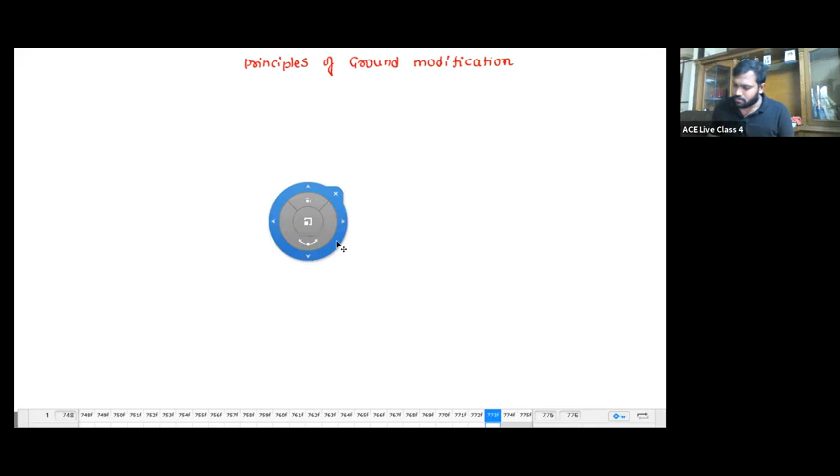Now let's come to this chapter. Actually I will include geosynthetics in the principles of ground modification techniques only. So coming to this chapter: principles of ground modification techniques. So what is the meaning of this principles of ground modification technique? What is the main purpose? The name itself says to modify the ground, that's it.

To modify the ground. In the case of the principles of ground modification techniques, what we are going to learn is, as I told you in yesterday's soil exploration chapter also, actually no soil is vulnerable, no soil is a weak soil, and no soil is a destructive soil. The soil will fail by accompanying to the structure on it.

For example, let me see this one. You know quicksand and liquefaction, right? Liquefaction and quicksand occur in the case of fine sands and silts. But do you think wherever there is fine sand and silt, there is going to be quicksand and liquefaction? Tell me, I want answers from you. Do you think wherever there is fine sand and silt, every time a liquefaction and quicksand condition occurs?

No. When does the liquefaction or quicksand condition occur? Though the soil is fine sand and silt, if there is an earthquake, then liquefaction comes into existence. And if there is an upward seepage, and in such a way that upward seepage must be equal to submerged pressure, gamma W into H is equals to gamma dash into H, then the soil will fail.

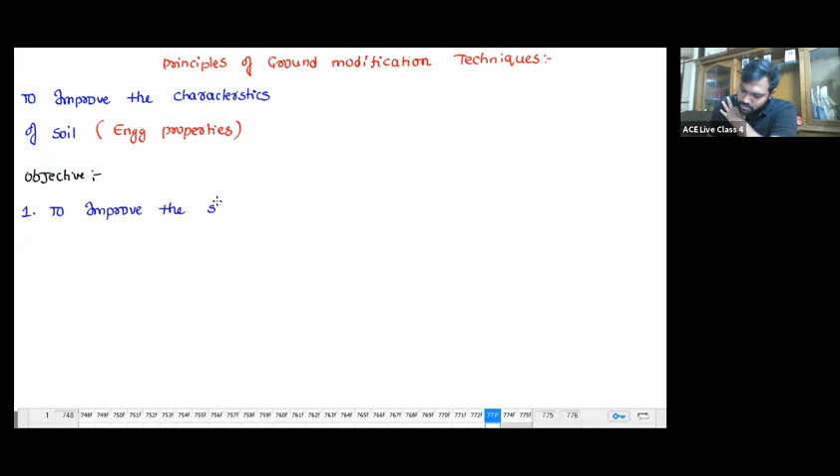Now if you observe the objective - what is our objective, sir? To improve the shear strength such that stability and bearing capacity of soil increases. So the objective is to improve the shear strength such that the stability and bearing capacity of soil increases.

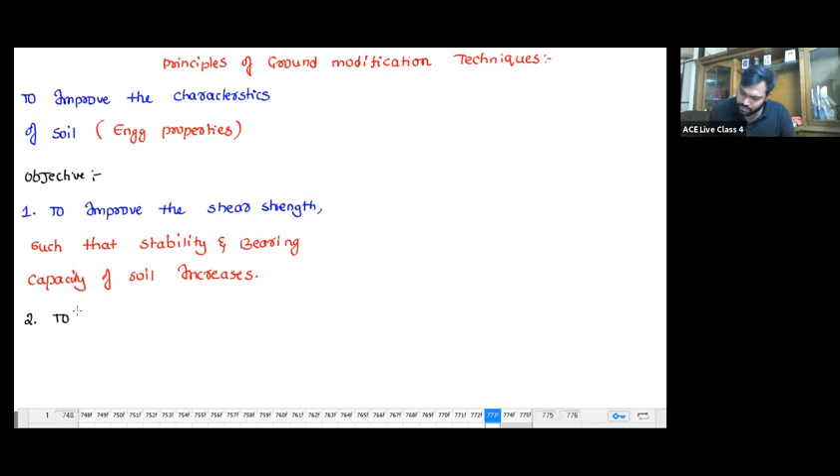Next, to reduce the compressibility of soil such that settlements of a structure reduces. So before construction itself, my main aim is number one, to improve the strength, number two, to reduce the compressibility.

Why, sir? In chapter 16, bearing capacity or shallow foundations, I told you we construct the foundation keeping certain things in mind. We should not allow the soil to fail either by shear or by excessive settlement. So the foundation should be designed for no shear failure and no excessive settlement. Which means I have to improve the shear strength, and in order not to cause excessive settlement, I have to reduce the compressibility. That's it.

It's not rocket science, nothing too complex here. So this is going to improve the characteristics, and now let's see what are the various methodologies.

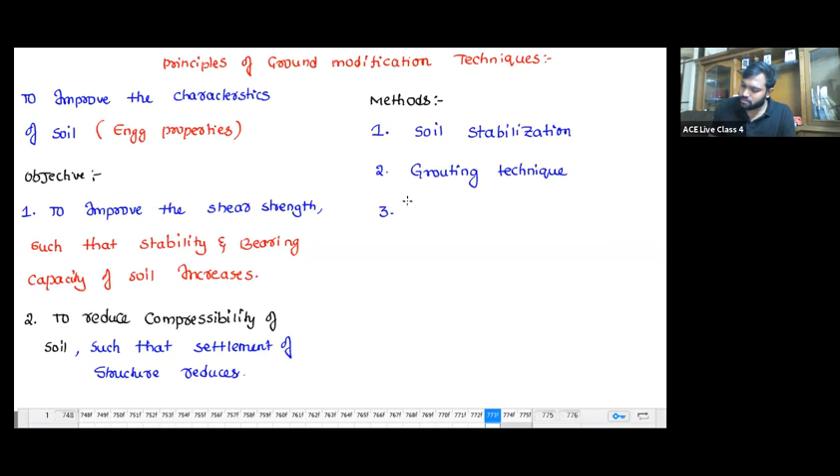Number one, soil stabilization. Number two, grouting technique. Number three, reinforcement. Number four, geomembrane, geosynthetics. Number five, dewatering techniques. So soil stabilization, grouting technique, reinforcement, geosynthetics, and dewatering techniques - these are the things we are going to discuss. Out of this, I have already included geosynthetics, which means the principles and uses of geosynthetics I am going to discuss in this same chapter.

Now, what is the meaning of soil stabilization, sir? Stabilization means to improve the strength and to reduce the permeability. We are going to do some stabilization like mechanical stabilization and chemical stabilization. Let's see what this stabilization is.

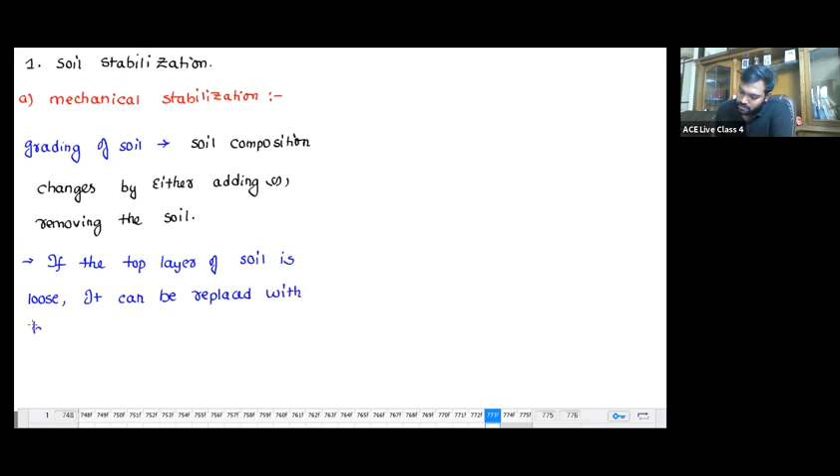If the top layer of soil is loose, it can be replaced with highly graded material, which in turn improves the grading of soil. So first, the soil composition changes by either adding or removing the soil. And then we are going to do the compaction.

After grading the soil, it should be compacted. What is the purpose of compaction? I have given you the necessity of compaction - to improve the strength, to reduce the permeability, and uneven volume changes like swelling and shrinkage are there.

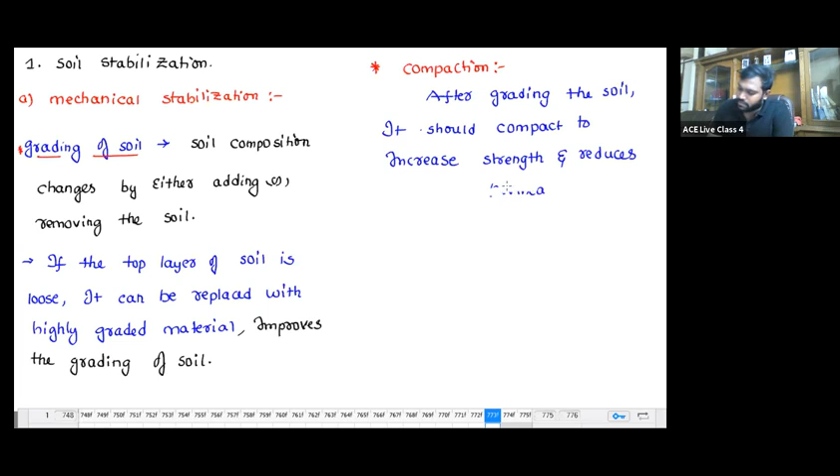To increase strength and reduce permeability, or in other words, reduce compressibility. So what are the various types of compaction we are going to do? In the case of compaction, there is shallow compaction and there is deep compaction.

The shallow compaction we are going to do by means of rollers: smooth wheel roller, pneumatic tire roller, and sheep foot roller - all these come as rollers. And the deep compaction comes by means of blasting technique, by means of impacting or impact loads, by means of vibro flotation.

You don't need to worry what are those methods, but you just need to know what are the various methods. What are the various methods? Okay, so this is about the compaction.

In the case of mechanical stabilization, I'm telling you again, we have to know what our main aim is, what is going to happen. So in mechanical stabilization, I am not adding any chemical. I'm just adding or removing the soil, and I'll improve the grading. Once you improve the grading, you simply compact it to increase the strength and reduce the permeability. So this is about mechanical stabilization.

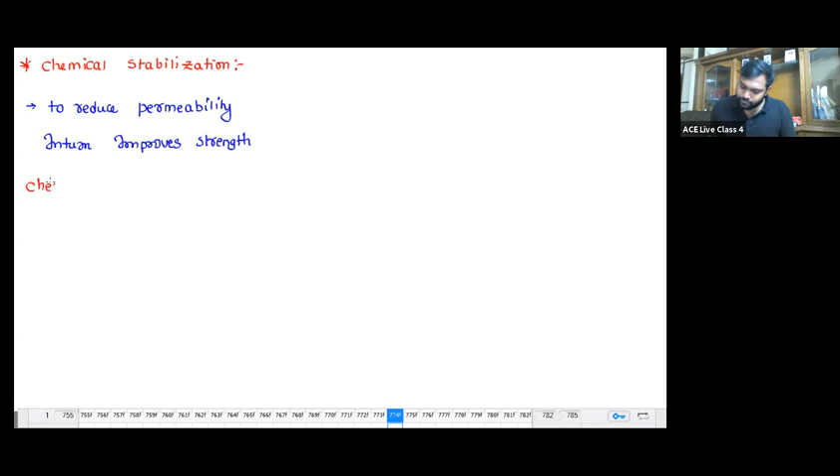The various chemicals that I can use are calcium chloride, CaCl2, sodium silicate, Na2SiO3. Okay, so calcium chloride and sodium silicate. And then we are going to see the other chemicals like lime, Ca(OH)2, bitumen. So these are the various types of chemicals that we are going to use.

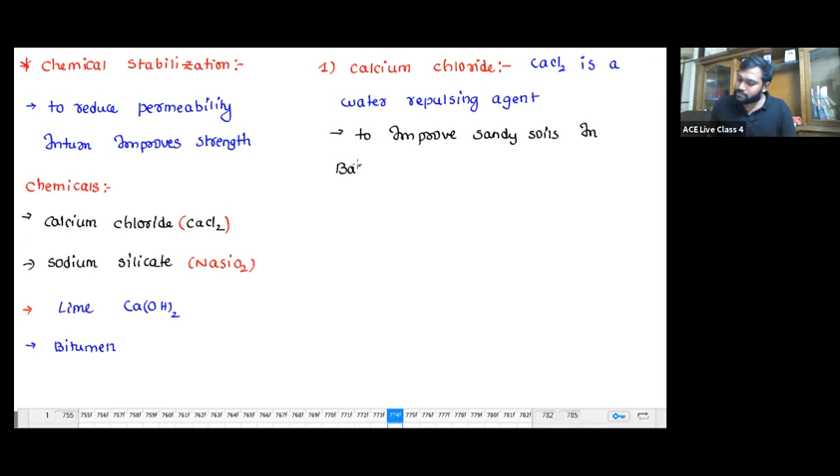So CaCl2 is a water repulsing agent, and it is used to improve sandy soils in base and sub-base courses of pavement.

Now, so CaCl2 is a water repulsing agent, and the second one is sodium silicate. So what is this sodium silicate, sir? Whenever you add this sodium silicate with water, this chemical with water along with calcium chloride - you are going to use both. So sodium silicate plus water plus calcium chloride.

When added to soil - when you mix the sodium silicate plus water plus calcium chloride into the soil mass, this mixture gives an insoluble precipitate known as silica gel. It induces an insoluble precipitate, silica gel, into the voids. Thereby permeability reduces.

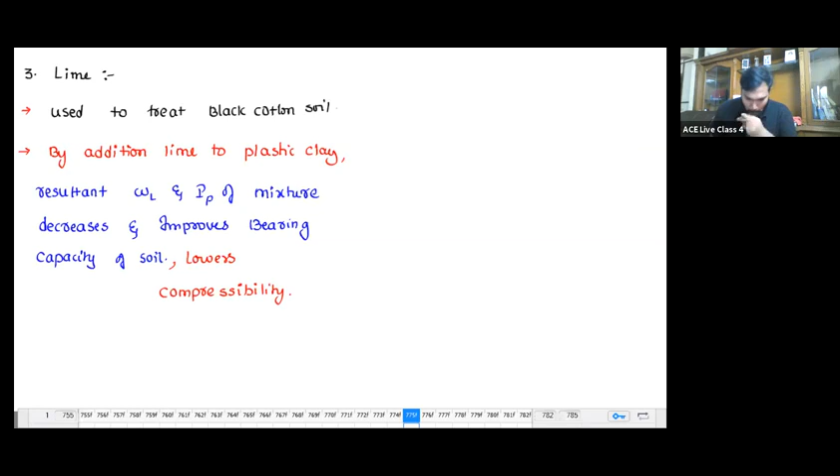Lowers compressibility. That's about lime. Yes, they have used it for the Leaning Tower of Pisa also.

Okay, next one: bitumen. Various forms of bitumen such as tar and emulsion are used to stabilize the subgrade and base courses of gravel and sand.

So in the case of gravel and sand, we are going to use bituminous tar and bituminous emulsion. Can we consider adding chemicals below PCC for anti-termite treatment as soil stabilization? No, that's not soil stabilization. That's to prevent termites, which is different. It does not improve the strength of the soil.

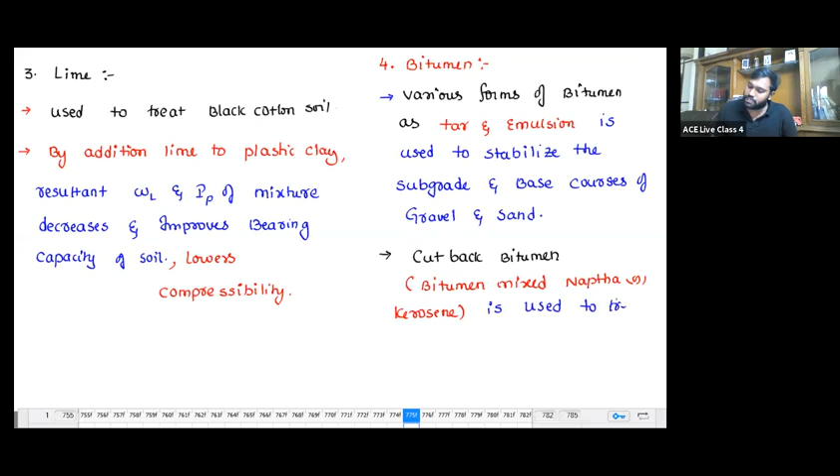In order to treat cohesive soils, we are going to use cutback bitumen. What is the meaning of cutback bitumen? Bitumen mixed with naphtha or kerosene. So cutback bitumen is used to treat cohesive soils. So various forms of bitumen are there, and cutback bitumen is there too.

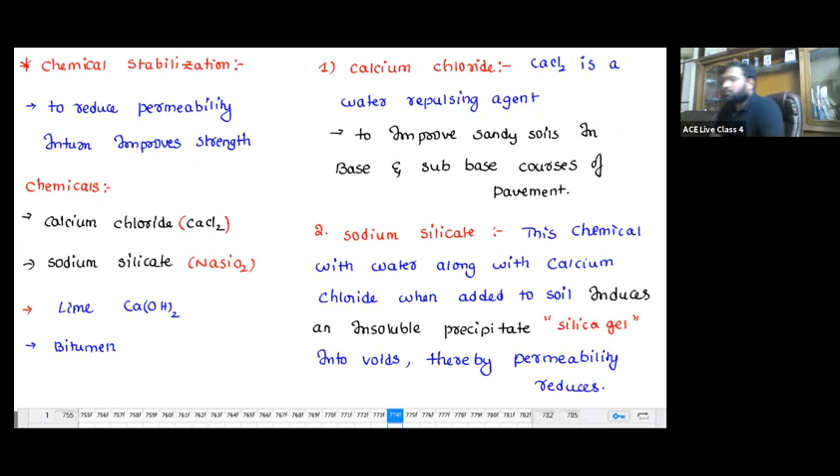So the third one is lime. These are the main chemicals we are going to use. The ground modification technique is a subject that implies one full semester, but for our examination, every 4 or 5 years they give one question, and they'll ask only basics. So we don't need to die over this chapter. That's why I'm giving you an overview of the various chemicals and their purpose. That's it, you don't need to go beyond that.

And next there comes grouting. So far and so good, whatever discussion I've made is for soil stabilization. So I stabilize the soil either mechanically or by adding chemicals. Now, what is meant by the grouting technique?

In simple words, it's just like injection. When you get fever or get ill, the doctor will give an injection, and that injection has medicine, yes or no? So the doctor gives the medicine by injecting into your bloodstream. Here, you means soil, doctor means engineer, and the medicine means stabilizer.

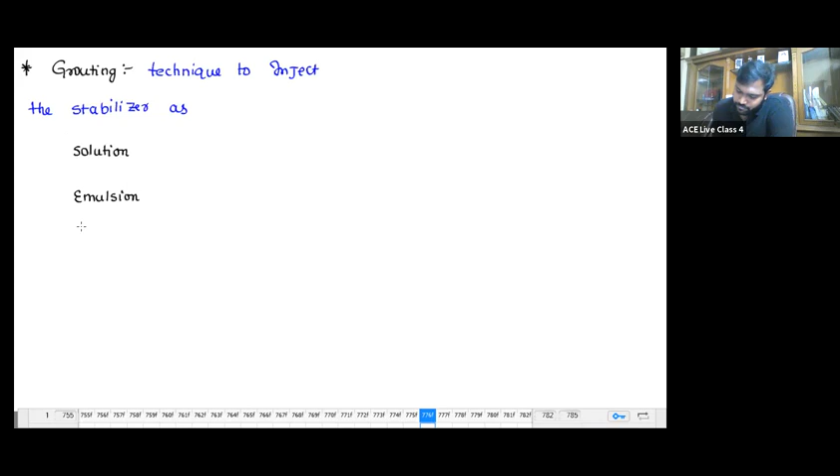So what is meant by grouting? Grouting is a technique to inject the stabilizer as a solution, or emulsion, or suspension.

So you are going to see the technique to inject the stabilizer as a solution, or emulsion, or suspension. The solution is going to be sodium silicate and acrylic nitrate, that's a solution. And emulsion is going to be bitumen emulsion.

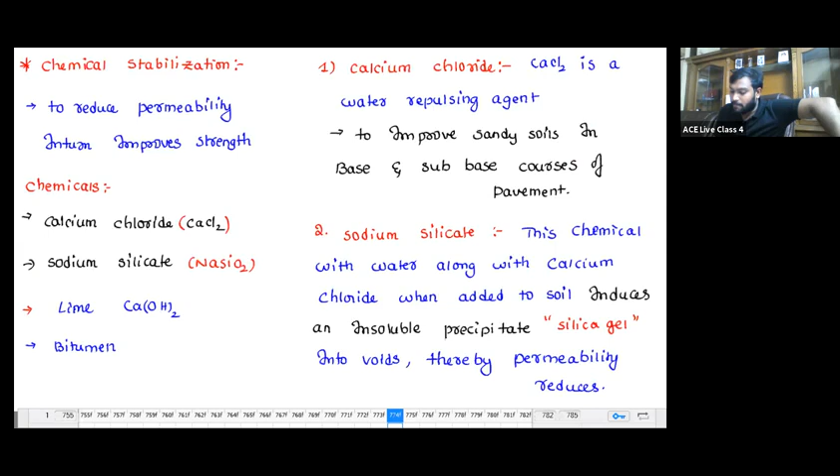And the suspension, that soil suspension we discussed, now it's going to be with cement, lime, etc. The difference between chemical treatment and this treatment is: in chemical treatment, we directly add lime to the soil, or while laying the base course we add bitumen, or sodium silicate while laying the base course. But in this case, I'm doing it after construction, because the soil is already there. If the soil is already there, how do I go about it?

For example, this is the ground level, and there are some cracks present somewhere, at a depth of 10 meters or 8 meters, let's say. There are some cracks. Now how do I fill this crack? How do I improve the strength? When there is a crack, if the load enters into that zone, the soil will fail.

So now, what is our main aim of the grouting technique? Basically, as it is an injecting phenomenon, you can do it anywhere. Do we do grouting in a dam? Yes, we can. Now, if you observe, our purpose in grouting is: number one, to fill

the cracks or voids. When you fill the cracks or voids, the strength obviously increases. Second, you know soil cannot stand vertical. And if you want to do excavation, you have to do it with a safe slope, otherwise you have to provide support.

If you want to go vertical, you have to provide support. Now what I do is, second, I'll induce a grout so that I will strengthen the soil. When you strengthen the soil, the requirement of lateral support will be less. And third, in the case of fine sand and silts, there is a possibility of liquefaction. So by grouting this stabilizer into the fine sand and silt, I can stop the liquefaction process also.

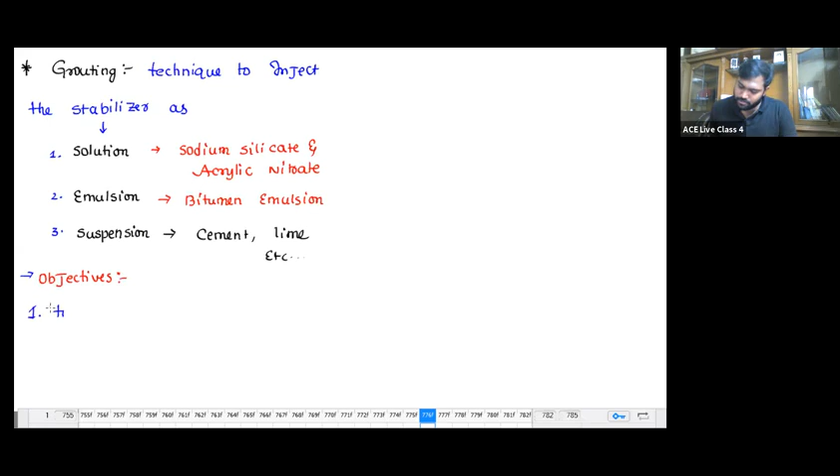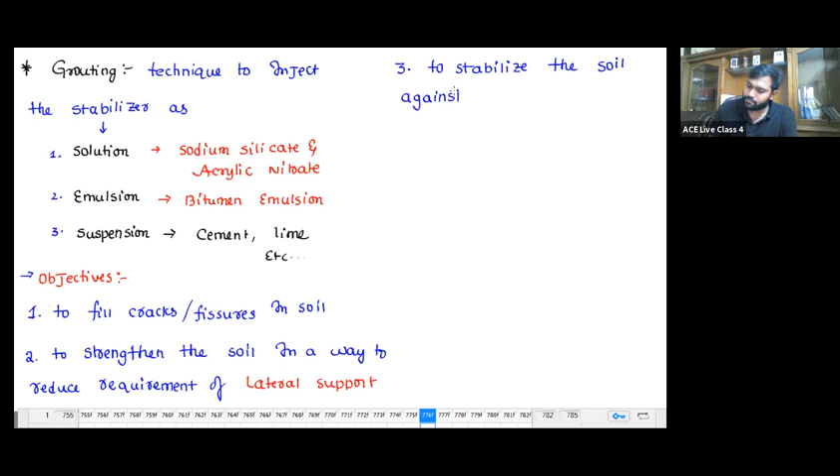So now, the objectives: number one, to fill cracks or fissures in soil. Number two, to strengthen the soil in such a way as to reduce the requirement of lateral support. Third, to stabilize the soil mass against liquefaction.

That's about the objectives of grouting, and let's see the various types of grouting. There are two types of grouting: one is permeation grouting, and the second is compaction grouting.

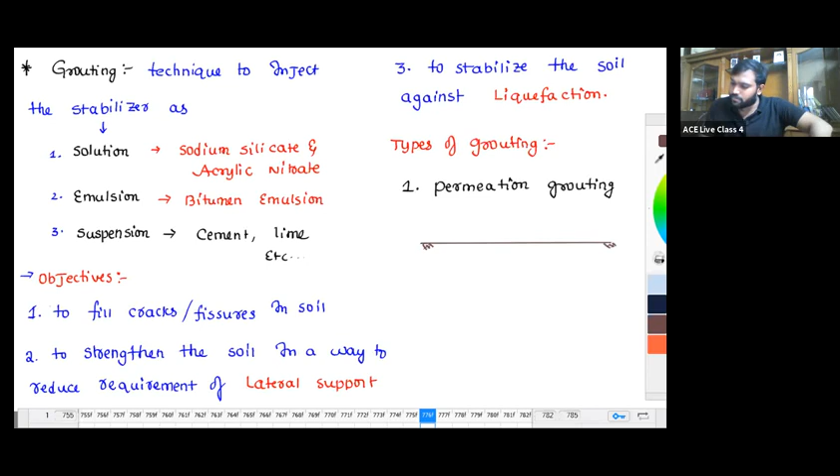So first, let's see what is meant by permeation grouting. How are we going to do the grout? For example, take this as the ground level. In order to strengthen the soil, we are going to insert a pipe known as a grout pipe.

Now, whatever stabilizer I'm going to use, either I can use it in the case of a solution. So this is nothing but a grout pipe. Once I have this grout pipe, I'm going to send the stabilizer by means of the grout pipe, and here you can fill the grout.

So there are different types of grouting here. This is nothing but a grout. The first one is permeation grouting. What is meant by permeation grouting?

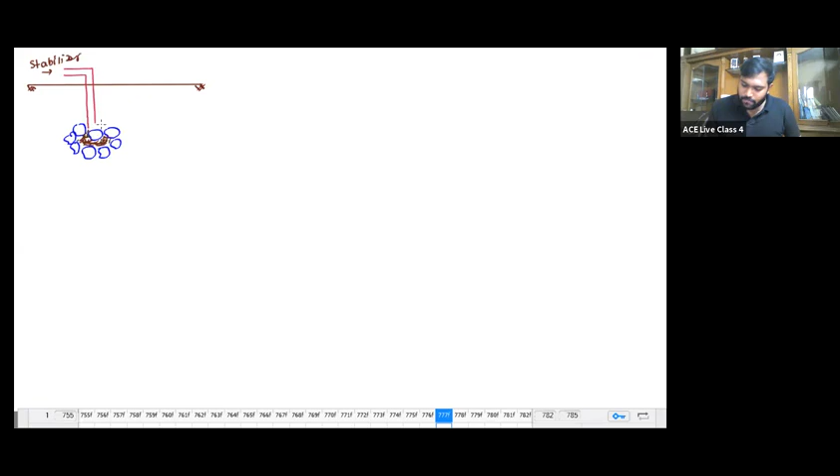Okay, now if you take a ground level, and if there are solid particles like this, and if I'm going to inject the grout - this is stabilizer - and if it just passes through the voids without displacing anything, such type of grouting is known as permeation grouting. In simple words, if the grout induced in soil does not displace the solid particles, we call it permeation grouting.

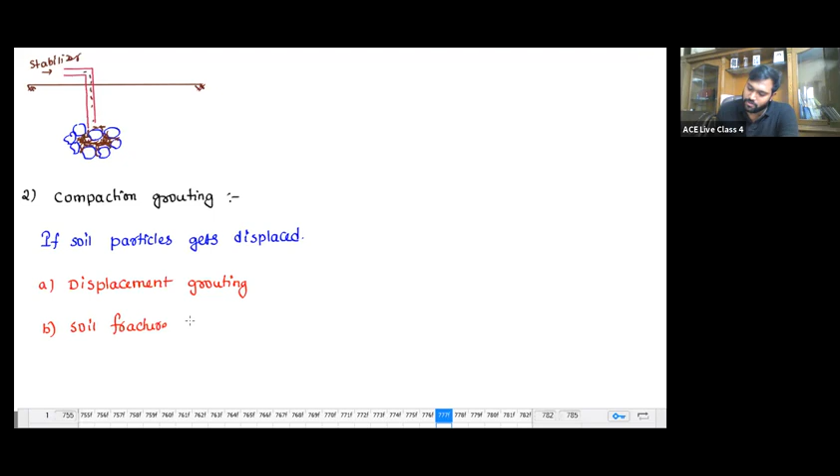Second one, compaction grouting. In the case of compaction grouting, if the soil particles get displaced, then such type of grouting is known as compaction grouting. Within this, we again have two types: displacement grouting, and soil fracture grouting, also called hydraulic fracture grouting.

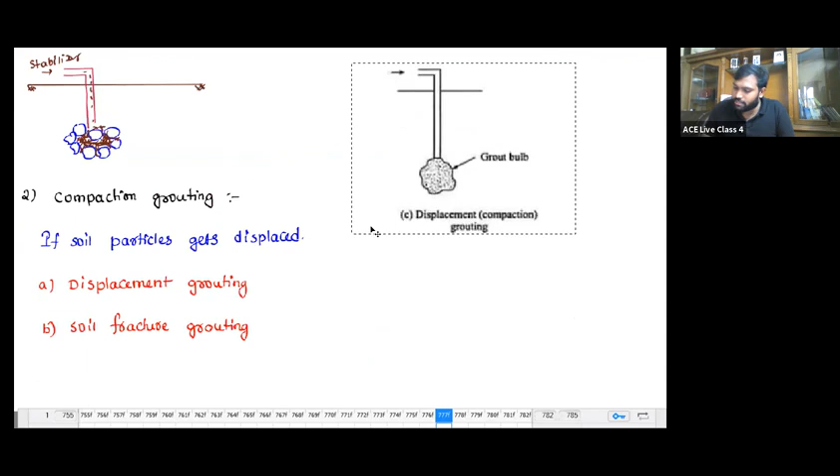In the case of displacement grouting, I can show you here - this is nothing but displacement grouting, and this is the grout bulb. So first is displacement grouting under compaction grouting. The reason the grouting has different types of stabilizers is based upon the application.

If I want to go for permeation grouting, it's just like a cement paste, so I will go for a solution. And if I want to go for displacement grouting, a thick paste of grout is used.

So there are different types of grouting. In simple words, if the solid particles do not displace, we call it permeation grouting. If the soil particles get displaced, we call it compaction grouting. That's about grouting.

Third one, reinforcement. The reinforcement is because soil is weak in tension - tell me, is soil weak in tension or weak in compression? Soil is weak in tension. So in order to improve the strength of the soil, we use steel tendons or mesh wires as reinforcement into the soil mass.

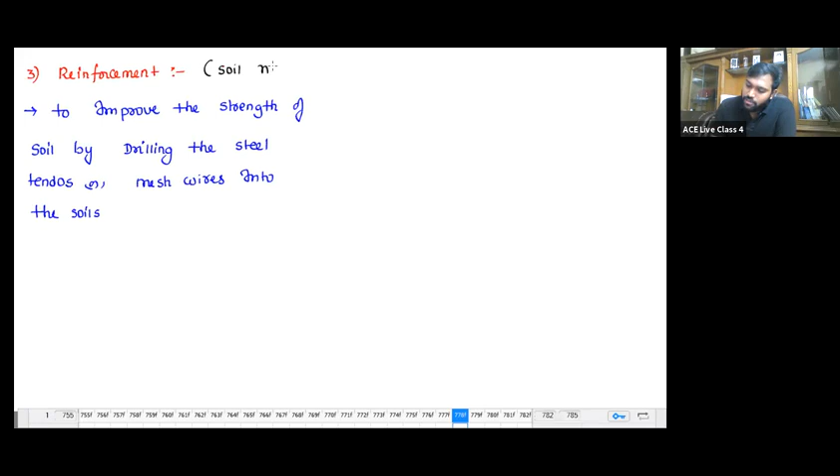To improve the strength of soil by drilling steel tendons or mesh wires into the soil, we call it reinforcement. In other words, we call it soil nailing. I hope you may have heard about soil nailing. In order to improve the strength of the soil mass, we simply drill the steel wires - it's just like a steel bar in concrete.

What is the purpose? If I do this, I am going to reduce 10 to 30% of the construction cost. I don't need to add chemicals or grout it. We just simply add this, and it will reduce around 10 to 30% of construction cost.

10 to 30% of construction cost can be reduced, and they are very flexible and easy to install.

Improves tensile strength. So the reinforcement is nothing but to improve the strength of soil by drilling the steel tendons or mesh wires into the soil mass. Now if you observe how they look like.

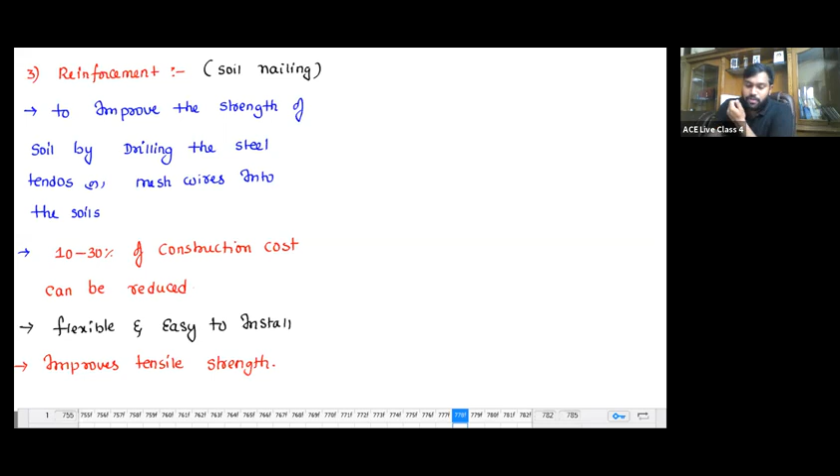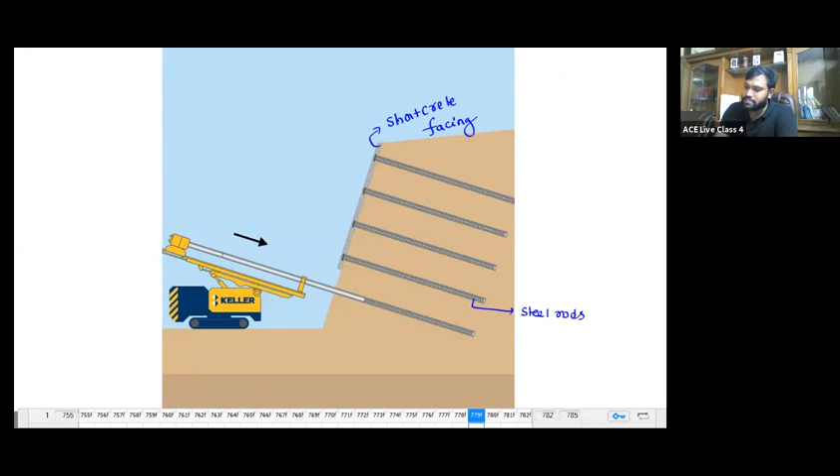Sir, do we do this while constructing tunnels? Yes, we do use this one while constructing tunnels. And one more example I can give you: while constructing embankments, I hope you remember the bridge abutments.

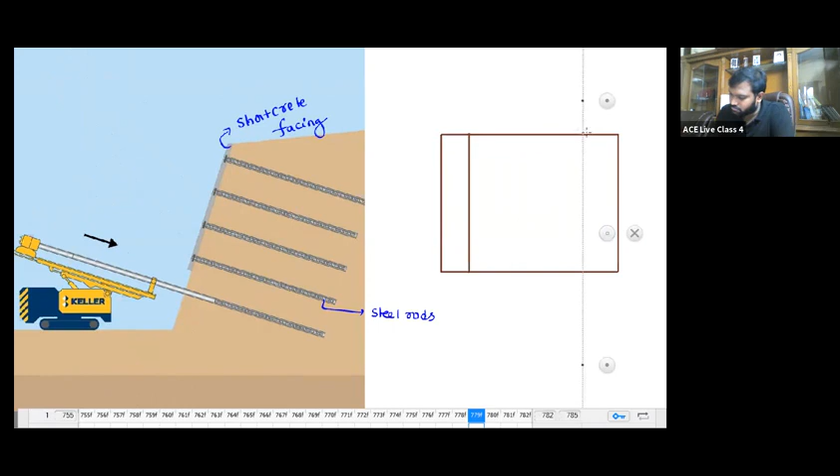So let's say this is a bridge abutment, and on top of it there is a road. Whatever this is, is nothing but a road or a pavement, and this is nothing but bridge abutments, flyover bridge abutments. And in between, what is the soil?

So here also, what we do is we are going to induce the nails before construction, so that I can improve the strength of the soil mass. So whatever this is, is nothing but soil nailing only.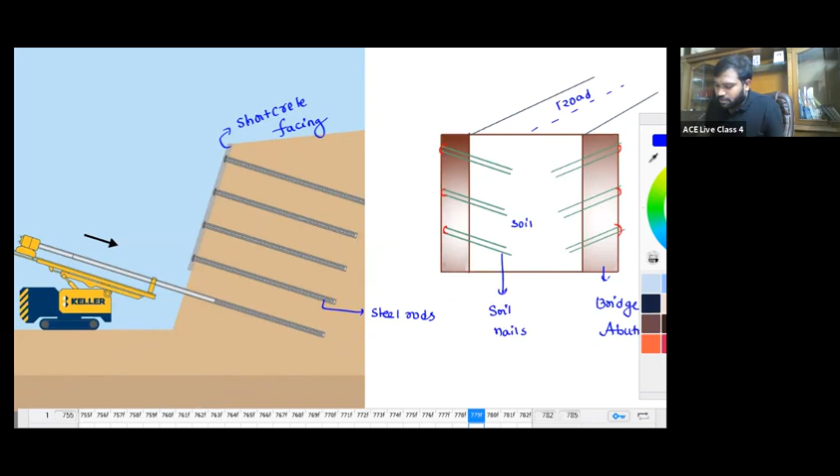Yes. Okay, fine. So this is how you can see it in reality. Where do you observe the soil nails? Steel takes tensile load, my dear, not compressive load.

See, when you apply the load, you observe, somebody is asking, this is compression and lateral is going to be tension, right? Whatever the applied load, vertical load is going to be compression. When you apply load, longitudinal compression causes lateral expansion, and the expansion is nothing but tension.

What do you mean by soil nail? This is not whatever, the steel rod that is there, that is nothing but the soil nail. So it's simply this nail. The nail is a steel rod which we induce into the soil mass, known as a soil nail. The steel rods can be called soil nails.

So that's all with the reinforcement also. And next there comes a very important topic: geosynthetics. So now, what is meant by geosynthetics? Start listening to this one.

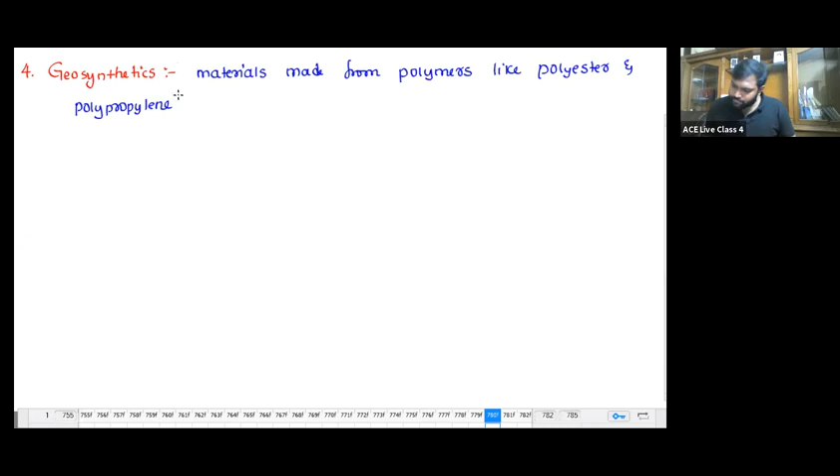Material made from polymers like polyester and polypropylene, gets mixed with the soil to improve the characteristics.

So where are we going to use this one? We use this in the case of pavements, airport runways, railways, embankments, earth dams, landfills, canals, tunnels, and even beneath the foundation, foundation of structures.

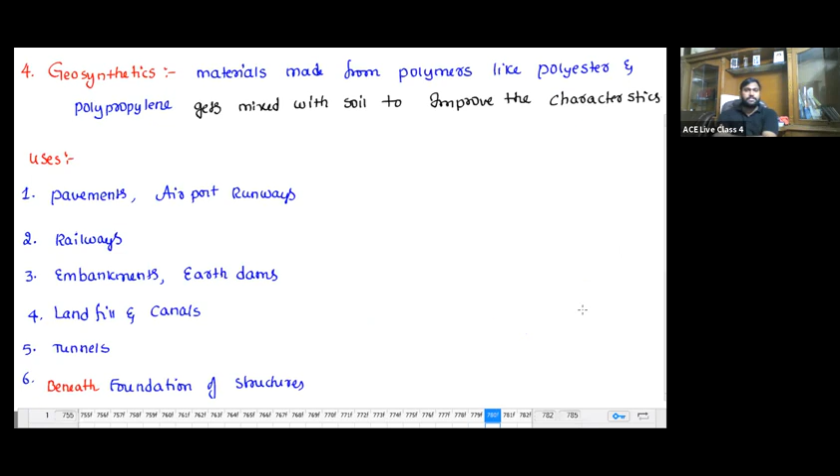The major functions of geosynthetics are: number one, as a separator. Geosynthetics can be used to separate the soil mass, to prevent the soil mass from mixing.

In the case of road or pavement construction, there is a subgrade, subbase, and base course. Between every course, in order to prevent the mixing of soils, we provide a geosynthetic. So to prevent mixing of soils, geosynthetics can be used for separation.

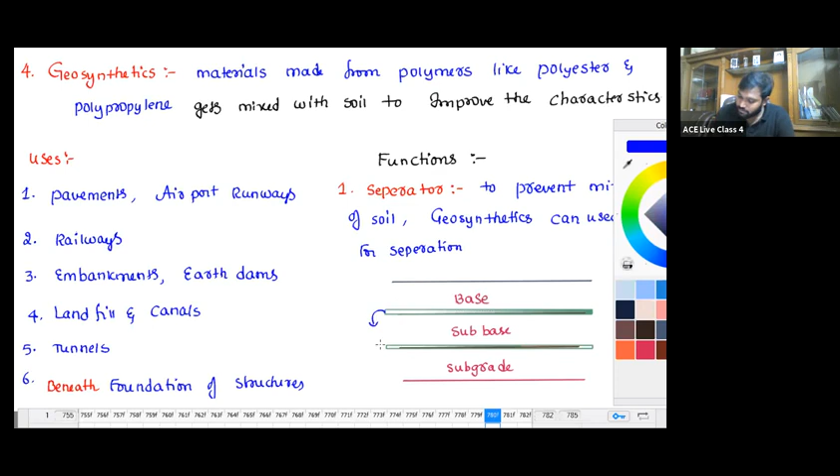For separation, you see this is subgrade, this is subbase, and this is the base or wearing course. What I mean by this is I'm going to provide the geosynthetic in this fashion. This geosynthetic will act as a separator between the soils, so it does not allow soil particles to move from one layer to another.

One more thing, it can be used as reinforcement also. First, the first function is separator. The next function is reinforcement. Recall what we discussed about soil nailing.

Similar to that, geosynthetics can be used as reinforcement to improve the tensile strength of the soil.

We apply this reinforcement especially in the case of retaining walls. When the wall moves away from the backfill, the soil is under expansion. When the wall moves towards the backfill, the soil is under compression. When the wall moves away from the backfill in the active state, the soil expands, meaning it is under tension, and that tension is taken care of by the reinforcement known as geosynthetic.

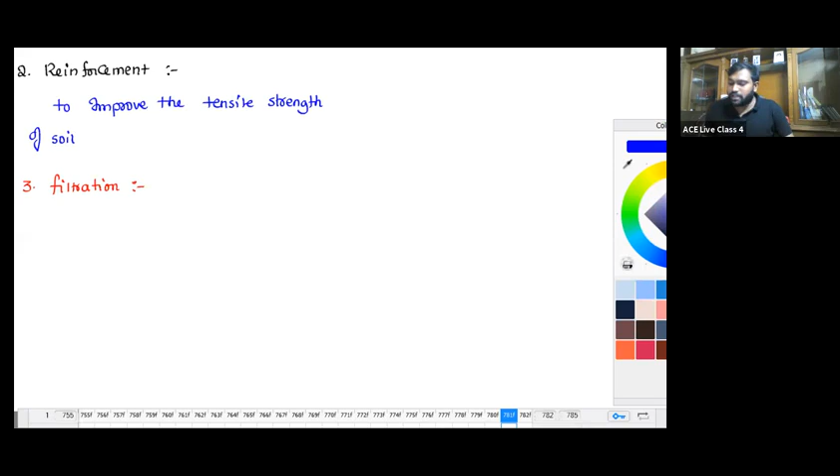So the other function of the geosynthetic is filtration, to allow the water to dissipate perpendicular to the plane, or vertically, which improves the rate of consolidation.

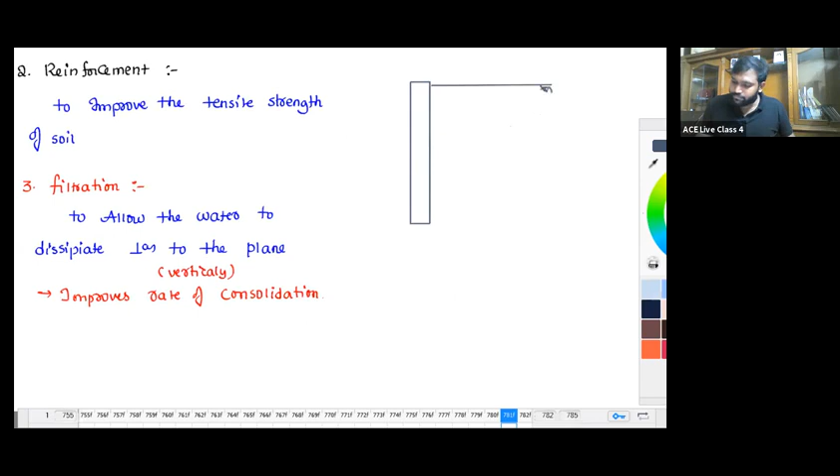Now if you take a retaining wall, this is the retaining wall, and this is the backfill. I can provide the geosynthetics somewhere over here. Whatever this is, is nothing but the geosynthetics.

If there is any clay layer, and there is a water table, or if rainwater is coming out, whatever load you apply—for example this above layer being dense sand—due to this load, if I fill the soil mass over here, the water can filtrate in the above and below direction. This is nothing but the cross plane, meaning perpendicular to the plane, and this is the geosynthetic.

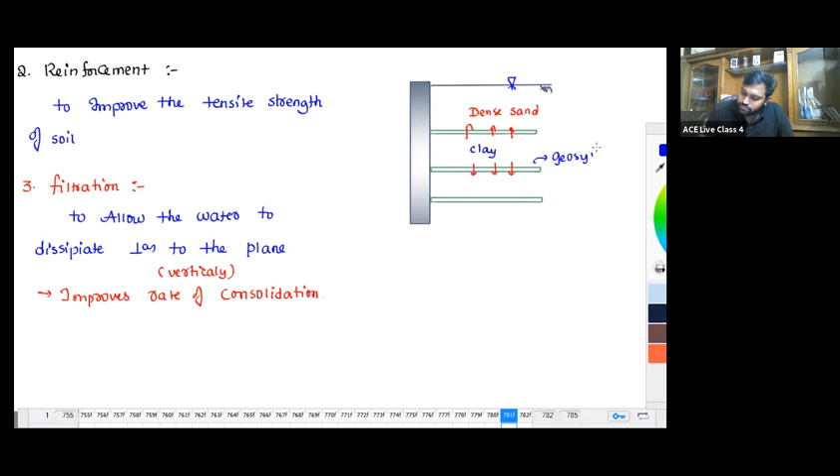These geosynthetics can also act as reinforcement to improve the strength of the soil mass—specifically the tensile strength. Keep that in mind.

The next function is drainage. Whenever rain occurs, the soil gets saturated, and in order to allow the water to drain through the weep holes—this is the weep hole—the geosynthetic membranes or materials will allow the water to drain.

To drain the water. So is this in-plane permeability or cross-plane permeability? This is in-plane permeability, and perpendicular is nothing but cross-plane. So drainage is going to be in-plane, along the plane or within the plane.

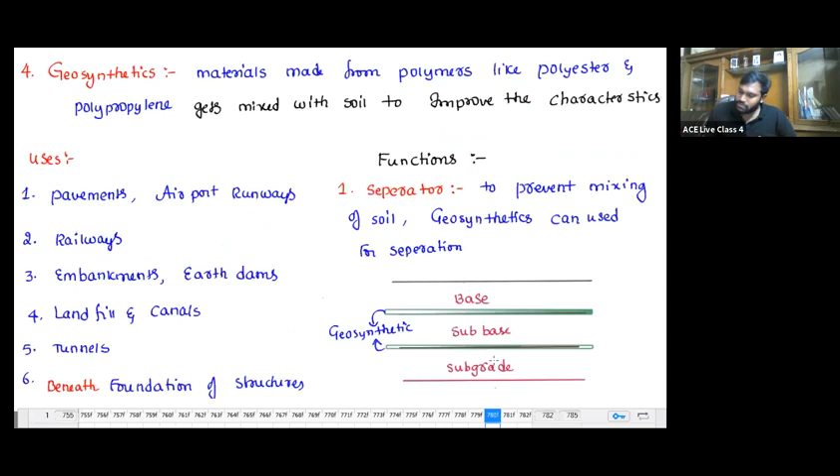Filtration is from one soil to the other soil mass. So one function is separator, second is reinforcement, third is filtration, fourth is drainage, and the fifth is going to be containment.

So what is the meaning of this containment, sir? The containment is in the case of landfills, or if you take a canal cut - if you cut a canal cut, something like this. Now when you allow water into this canal, there is a possibility the water can seep into the soil mass. Yes or no? There is a possibility water can seep into the soil mass.

Now I can use the geosynthetics as a barrier to control the migration of water into the soil. I can use the geosynthetics as a barrier to control the migration of liquids into the soils. So it's nothing but a barrier to control the migration of liquids and gases.

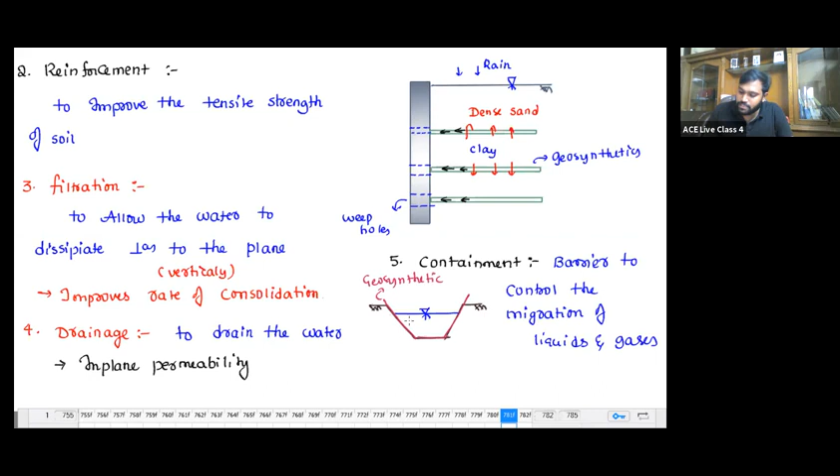So if I provide a geosynthetic in the case of the canal cut, then no water will go into the soil mass. Another example is a landfill - a municipal solid waste landfill. This landfill, on the top, sides, bottom, everywhere, is going to be provided with the geosynthetic.

In the case of the municipal solid waste landfill, during rainy season the waste can undergo decomposition. Once it decomposes, it gives a foul smell and releases methane gas. When that methane gas releases into the environment or atmosphere, you know how it smells. So if I provide the containment, meaning if I provide the geosynthetic, it will not allow the gases to migrate outside. So these are the various functions of the geosynthetics.

Sir, can all the functions be there in one geosynthetic? There are various types of geosynthetics, and based upon the requirement, we go for that geosynthetic.

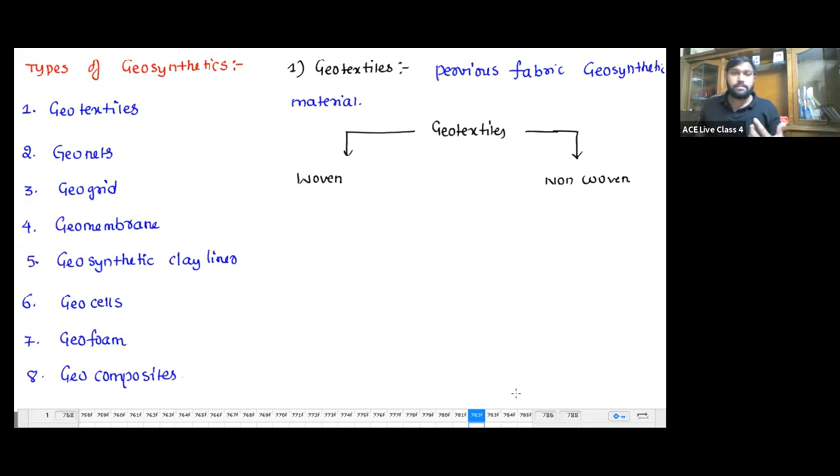And what about woven, sir? Woven is nothing but like our shirt, you can imagine our shirt. So in the case of woven, it's a uniform and regular weaving of threads in both directions.

Non-woven is prepared by hot bonding or resin bonding. So in the case of woven, it's uniform and regular weaving of threads in both directions, while non-woven is prepared by means of hot bonding or resin bonding.

In the case of woven, you can see the visible pattern of the threads. In the case of non-woven, you cannot observe the visible pattern of the threads.

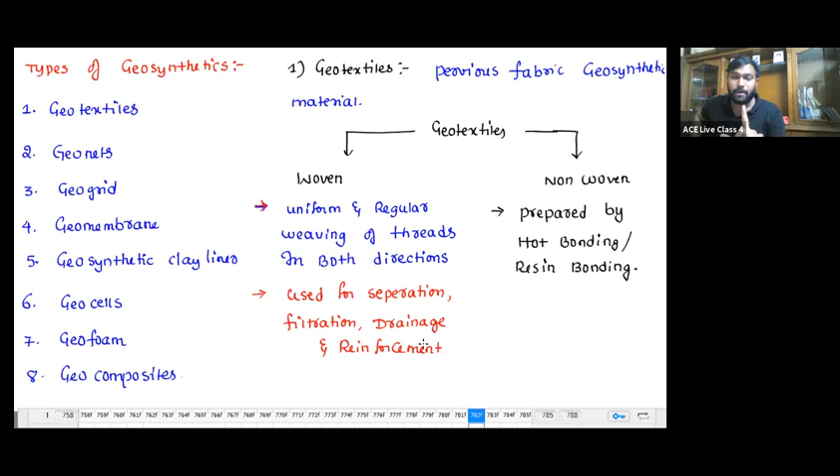These are used for separation, filtration, drainage, and reinforcement also. Which means in the case of geotextiles, we mostly use the woven type because woven is useful for separation, filtration, and reinforcement, except for containment.

Why not for containment? Arey baba, for containment I cannot allow the water to go out, but this is pervious. As it is a pervious member, water or gases will definitely penetrate into it. So geotextiles cannot be used for containment.

And if you see non-woven, you cannot see the visible pattern between the threads. When there's no visible pattern between the threads, it cannot be used for filtration or drainage, because for filtration and drainage it should be pervious. Compared to woven, non-woven is less permeable, so this is suitable.

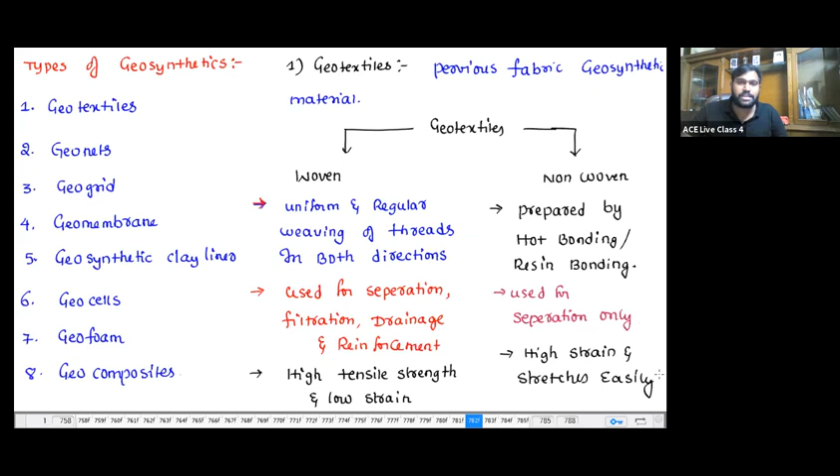But this one has high strains and stretches easily. So as it stretches very easily, I cannot use this non-woven geotextile as reinforcement. So the most commonly used geotextile is woven geotextile.

The most commonly used geosynthetic is woven geotextile. So eventually, what are its functions? Just now I told the functions for this one. The function is that it can be used as a separator, as filtration, as drainage, and it can be used for reinforcement also.

Okay, and generally whatever geotextile we take, whatever geotextile we take, this is nothing but a geotextile, right? So the geotextile is a sheet.

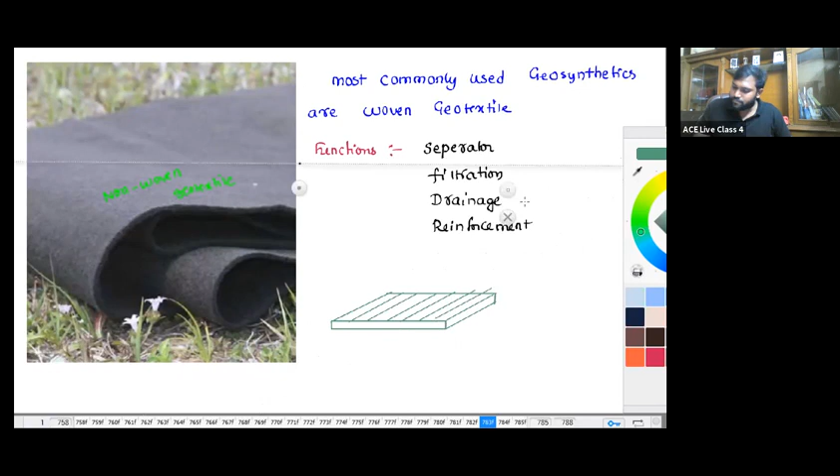So now when you allow the water, this is nothing but water, and this water gets filtered. This is filtration. And the same water can get drainage in the longitudinal, meaning in the lateral direction. This is nothing but drainage.

So please observe, the geotextile behaves like both a filter and a drain. And in the case of filter and drain, the geotextile must consist of permeability in both directions.

So now in this case, the filtration depends upon the cross-plane permeability, known as permittivity.

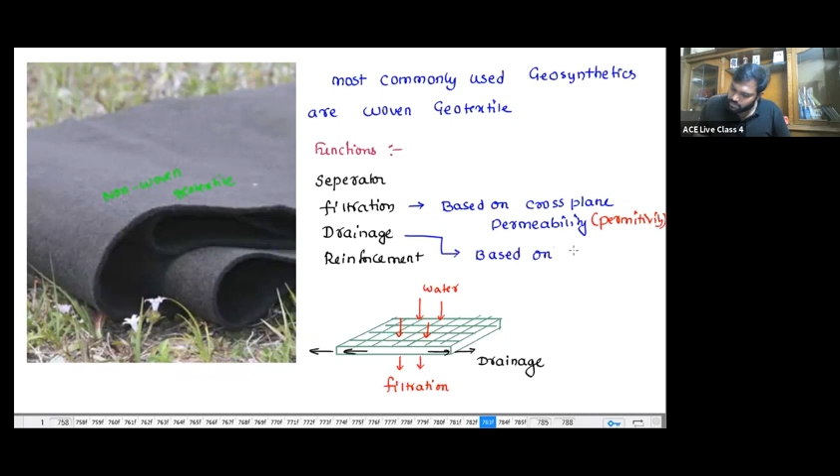And the drainage is based on in-plane permeability, known as transmittivity.

So in the case of geotextile, as it can be used as both filtration and drainage, the geotextile must be having good permittivity and good transmittivity, and this will happen only if there is a proper thickness. Without proper thickness you cannot get it done. So this geotextile is used for all these functions, and it is the most commonly used.

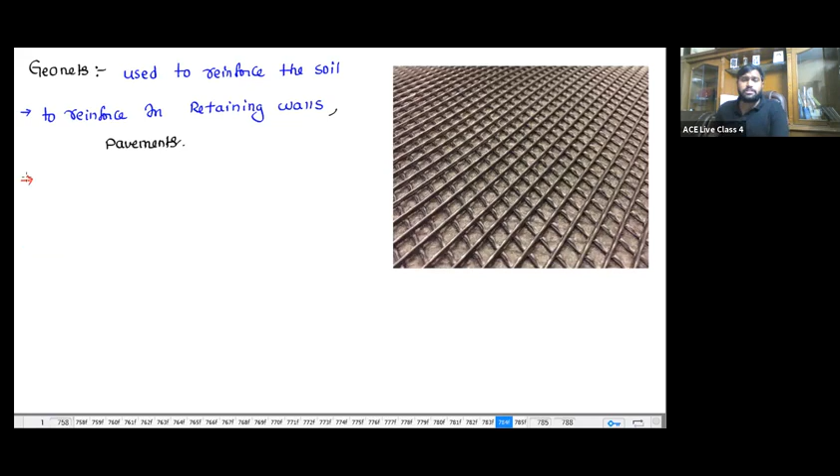Out of all the geosynthetics, it has a high strength, possessing more strength out of all geosynthetics. It has a very high strength out of all the geosynthetics, and you can see it's like a grid-like structure with large apertures.

So geogrids, out of all the entire geosynthetics, if you want to go for only the reinforcement, then you can go for the geogrids. Why? Because it has very low strain and stretches maximum 2% on any load. What is the meaning of maximum 2%? The strain can be only a maximum of 2%.

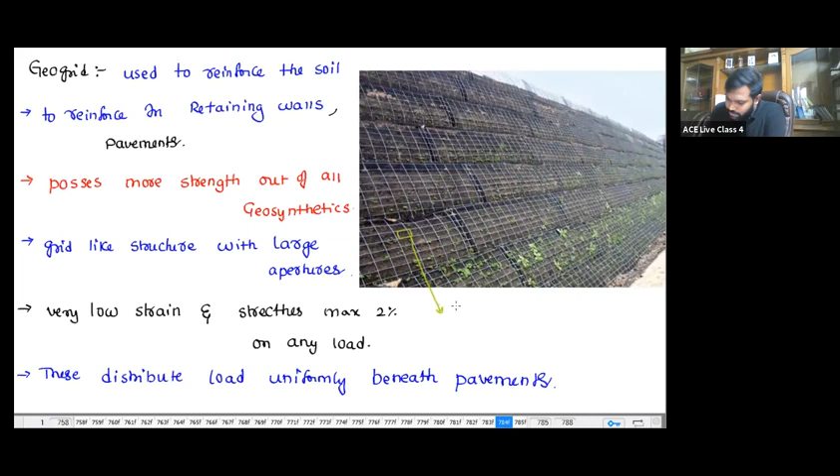So this GeoGrid, you can see, has large aperture sizes, and moreover, these apertures are going to be square openings. Yes or no? They are square apertures. So GeoGrid is used to reinforce the soil.

And next, after this GeoGrid, there is one more thing: GeoNet. Now this is a GeoNet. Actually, GeoNet is similar to the GeoGrid. Okay, so in the case of the GeoGrid also, you can see large spaces are there.

You may ask me, can I use this GeoGrid as a separator? Due to the large opening, the particles will enter from one layer to the other layer, so it cannot be used as a separator. Can I use it as a filter or for drainage, sir? You cannot use it as a filter because along with the water, particles will also pass. You cannot use it as a drainage either, because the thickness is very small.

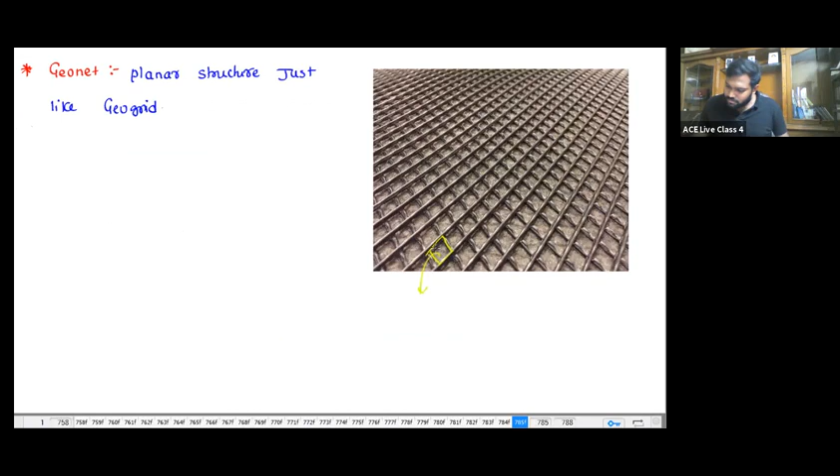The thickness is less. But you see, the GeoNet is a planar structure, just like GeoGrid. So this is a GeoNet. In the case of the GeoNet, you can see the aperture openings are diamond shaped. So that's going to be a diamond shape aperture. In the case of GeoNet, it's nothing but a planar structure, just like a GeoGrid.

Now the grid ribs are arranged in both directions, and apertures are diamond shaped.

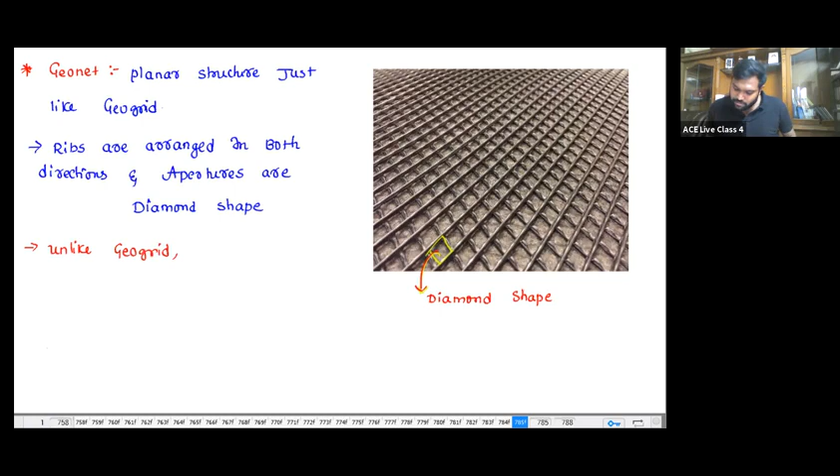Sir, what is the function of this GeoNet? The main function of the GeoNet is, unlike GeoGrid, GeoNet has more thickness and can allow in-plane drainage. So the major function of the GeoNet is simply drainage. Here the function is drainage.

So now in the case of the GeoGrid, the function is reinforcement. And in the case of the GeoNet, the function is drainage. Now, next come to the geomembrane.

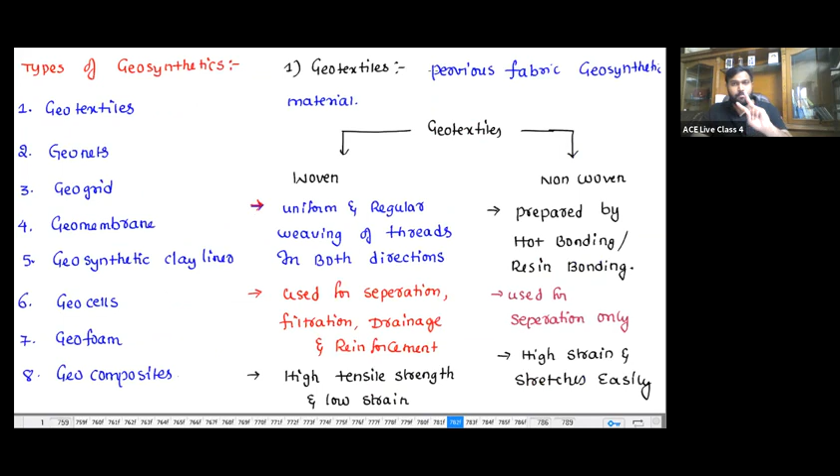Geomembrane. Out of all the geosynthetics, the geotextiles are more pervious and useful for separation and filtration. But out of all the geosynthetics, the geomembrane is highly impervious in nature. It's an impervious geosynthetic material.

Now, knowing this, the thickness is going to be very small. So what might be the uses of this geomembrane? Think and say. Very good, containment.

The biggest advantage of the geomembrane is containment. If you don't want to allow water to seep into the soil, use geomembrane. For separation, mainly you go for geotextiles. If my main intention is strength only, I go for the geogrid. If my intention is filtration, drainage, everything, I go for the geotextile. And if my intention is to prevent the migration of liquid or gas, I go for the geomembrane.

So it's an impervious geosynthetic layer acting as a barrier to prevent migration of liquids and gases. That's nothing but the geomembrane.

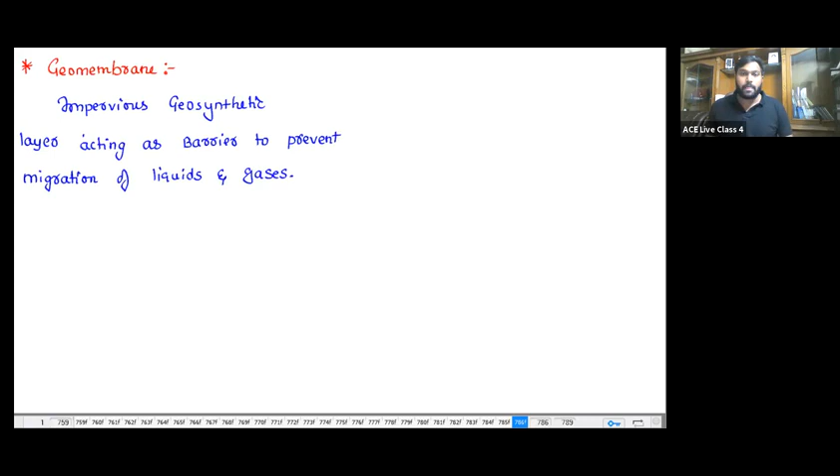Here, as its permeability is going to be very low, the permeability is around 10 to the power of minus 11 to 10 to the power of minus 13 centimeters per second. Uses include landfill lining, canal lining, tunnel lining. For the lining purpose, we use the geomembrane.

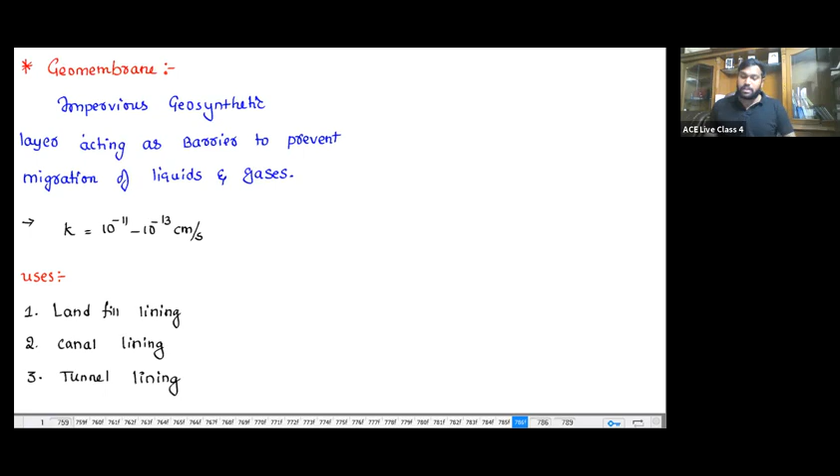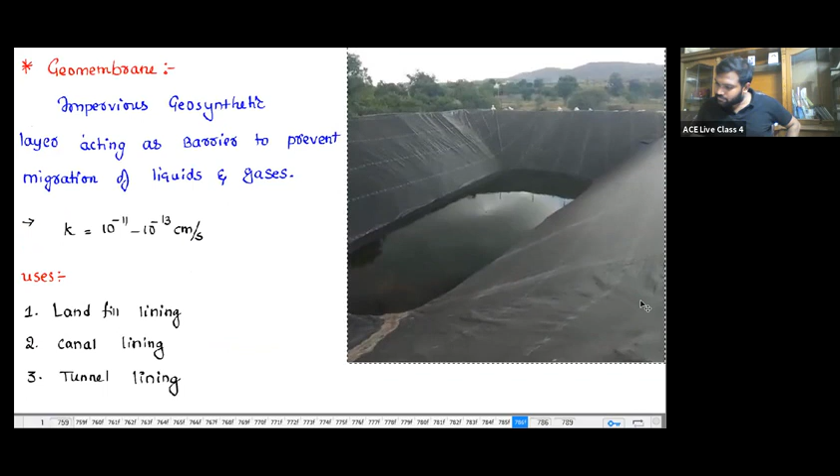Yes, you can see, this is nothing but a geomembrane. Its main function is containment. So this is about the geomembrane.

Waterproofing. Sir, are these similar to non-woven geotextiles? No. Actually, these non-woven geotextiles are going to be pervious only. Though their weaving structure cannot be seen, they are not impervious like a geomembrane.

Next, after the geomembrane... You know what, this is the first time I am taking these many pages. Last time I took around 650. Now this time it is about to cross 800. It's like one textbook. If you take a Xerox of this one, I think it would look like a textbook.

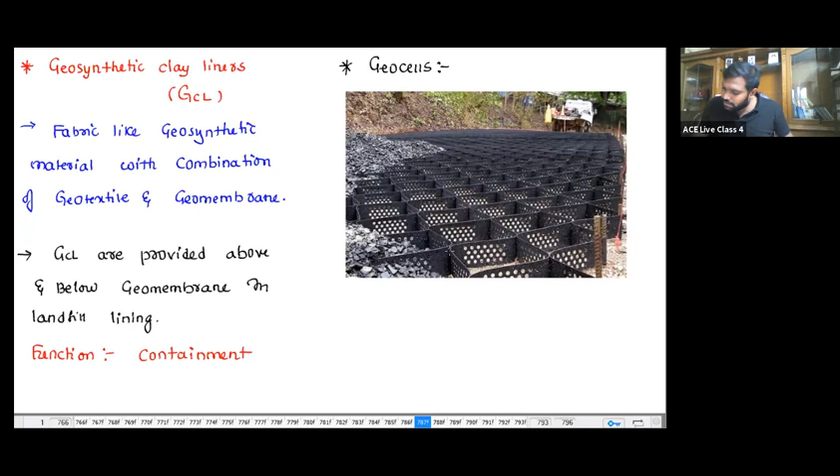Next, geocells. So what is this geocell, sir? You can see this, this is nothing but a geocell. If you observe, it's like a honeycomb structure. Moreover, on the sides there are holes, and due to these holes, if I keep the geocells, water can pass through it. So these are a three-dimensional honeycomb structure.

These are three-dimensional honeycomb structures. The main purpose is to control soil erosion and allow drainage. This is nothing but the geocell. Exam means a function - the functions are drainage only. The function is simply drainage.

So in the case of the geocell, it's a three-dimensional honeycomb structure to control soil erosion and allow drainage. The function is simply drainage. You have to look at the functions - the functions are very, very important. Anyway, at the end, I'm going to give you a table form.

And next, geofoams. The geofoam, how does it look like? Where is its figure? I'll show you that. Okay, I hope you people can be seeing this one. This is how it looks like. Geofoam.

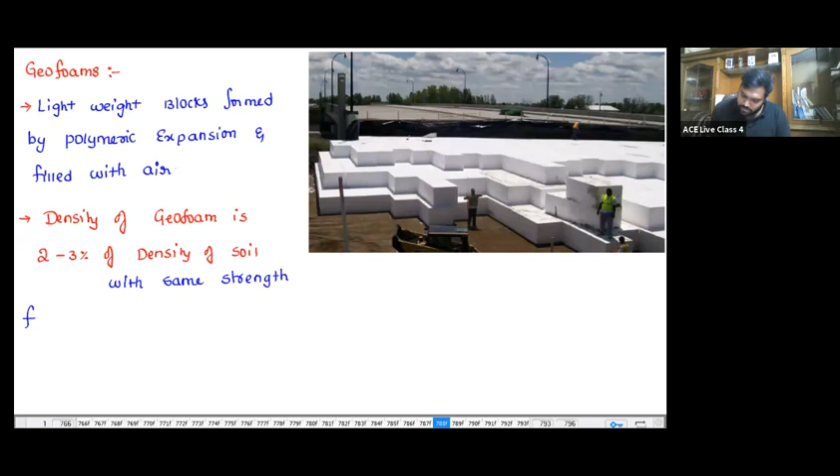Its main function is simply to separate the soil. Separation.

And the last one is geocomposites. Geocomposites is a combination of two or more geosynthetic materials.

Last one, geocomposites. It's a combination of two or more geosynthetic materials, to obtain all functions. All the functions means, let's take geotextile - it can be used as a separator, it can be used for filtration, it can be used for drainage, and it can be used for reinforcement also, but it cannot be used for containment.

So what I can do is combine geotextile and geomembrane. If I use both in a given system, I provide geomembrane on the outer sides, and I provide geotextile in between. In between, filtration and drainage will happen, and it provides strength. Outside, I provide the geomembrane - it will not allow gases or liquid to leak out.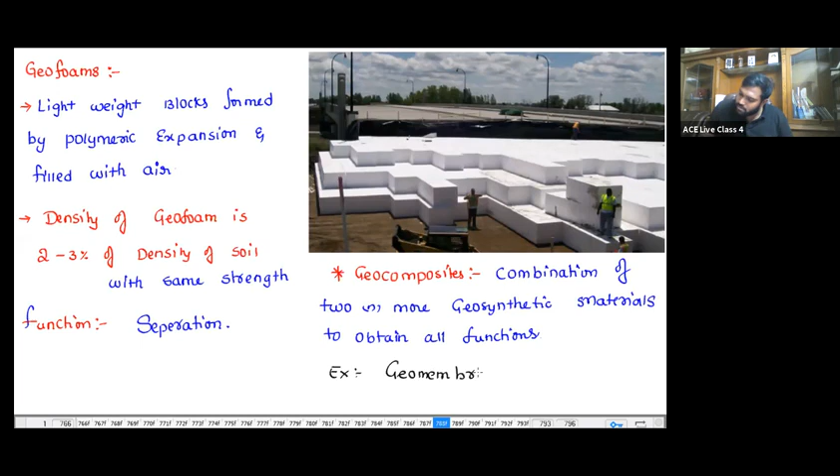Example: geomembrane, geomembrane, geotextile. Okay.

Okay, fine. So that's about the different types of geosynthetic materials. There are no numericals - it's all complete theory. Not even a single numerical you are going to see. It's all complete theory only. Give me a minute.

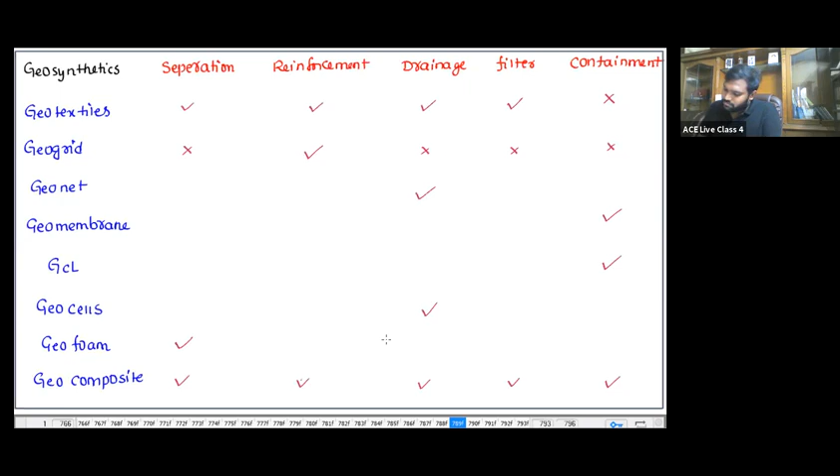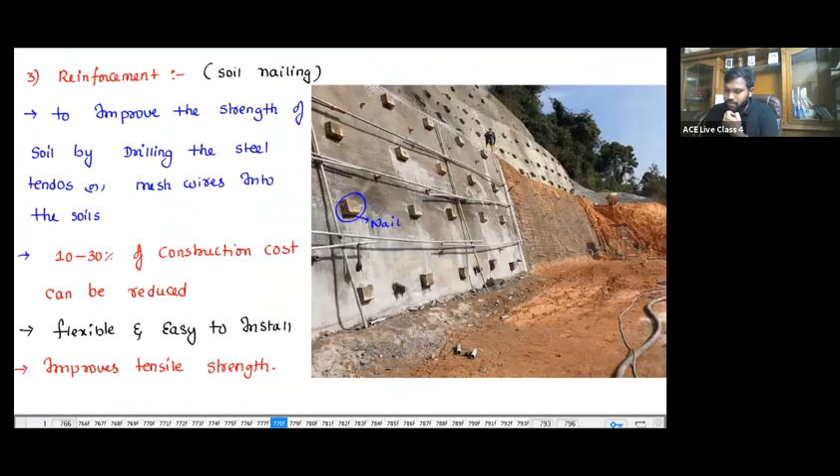This one table gives you everything. Hope you understood. So that's all about the total ground modification techniques, principle of ground modification techniques, and geosynthetics.

And you see the dewatering techniques are simply: deep well point system, electro-osmosis, vacuum method, sumps and ditches. So what is the meaning of dewatering technique? The dewatering technique is simply to remove the water from the structure, meaning to remove the water from the soil mass. I'll just give you a figure.

No. Also not there. Yeah, okay. But anyways, okay, fine.

So the purpose of these dewatering techniques is - you know that whenever there is a water table, the rise of the water table reduces the bearing capacity, shear strength, and effective stress. In simple words, the dewatering technique means you are going to lower down the surrounding water table by means of some methods: deep well point system, electro-osmosis, vacuum method, and sometimes sumps and ditches.

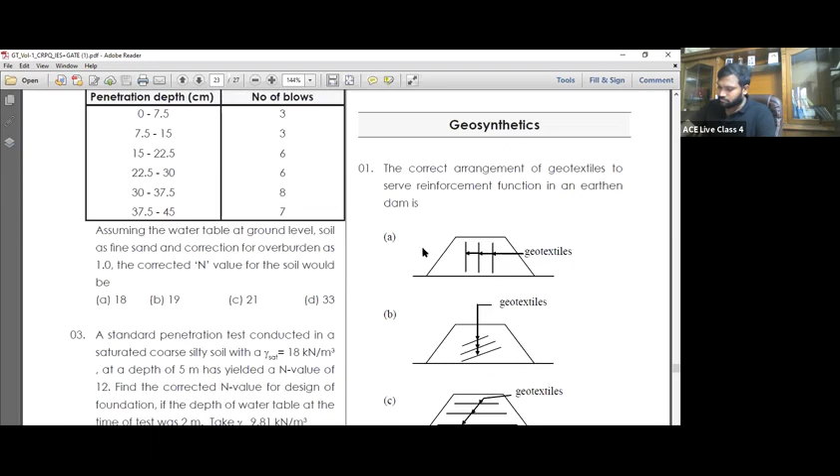I hope you can see the question here. If you observe, the correct arrangement of the geotextiles to serve reinforcement function - this is not the way geotextiles are going to be provided. They are going to be provided in this manner, not vertical and horizontal. That sheet is going to be spread horizontally.

So no need to study sheet pile walls, well foundation, foundation on expansive soil. Earlier there were foundations on expansive soils, well foundations, and sheet pile walls - you can find these in the previous ESE material. But in the last 3-4 years, geosynthetics and principles of ground modification techniques have been introduced, and from then onwards they stopped asking well foundations, sheet pile walls, or foundations on expansive soils. No questions have appeared on these in recent years.

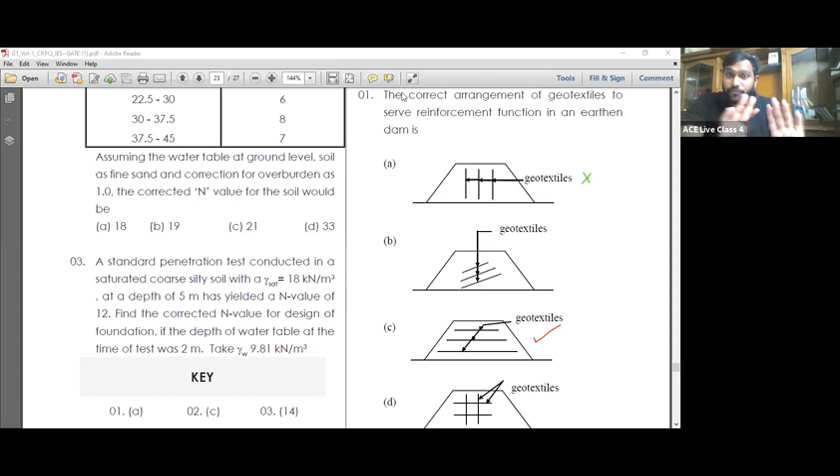Okay, if you ask me, I'll show you some things, you observe here. First, let me complete this. Wait a minute.

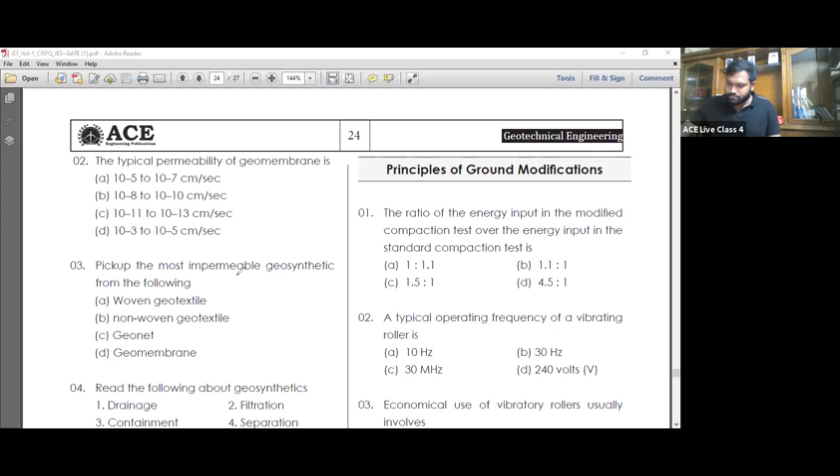Now you see the fourth question, question number 4. Read the following about geosynthetics: drainage, containment, reinforcement, filtration, and separation. So which of these are functions that geosynthetics include? They include everything - it can be used as drainage, containment, reinforcement, filtration, and separation.

To perform the drainage function, the geotextile needs in-plane permeability - cross-plane permeability is different. Drainage is nothing but in-plane permeability, and it must have sufficient thickness, good in-plane permeability. Cross-plane permeability is for filtration, with sufficient thickness and transmissivity or permittivity - in-plane transmissivity, cross-plane permittivity, so good transmissivity. The correct answer is 1, 3, 4.

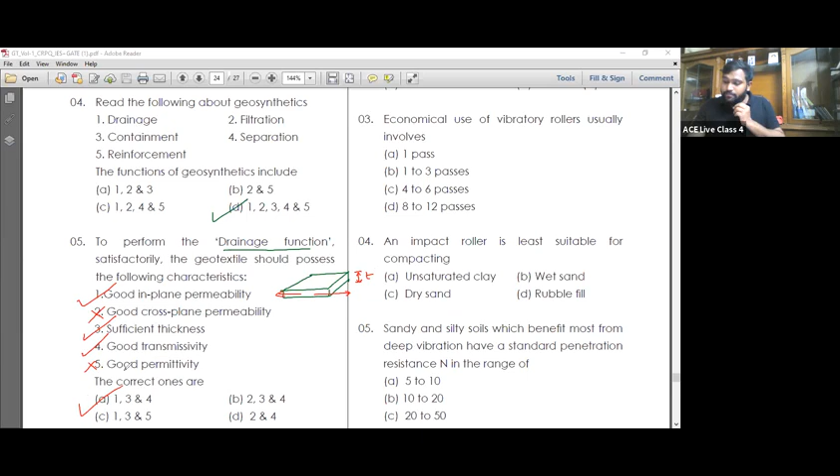And regarding the principles of ground modification technique, I'm telling you and ordering you, don't go beyond these points, whatever provisions I have provided you here. If you want to explore, the principles of ground modification techniques is going to be too vast, too high. There are many methods, but we don't require all of those, so keep that in mind.

There is a possibility of around 3 to 5% only to get a question from this chapter, which means on average every 5 or 6 years one question, and they may or may not ask it. So do not spend too much time on these chapters - spend more time on the first 18 chapters only, not on the remaining chapters. What I'll do is add the well foundations and give you the foundation on expansive soils - I'll share my previous notes on that.

But I'm telling you, as per the present syllabus, it is not there. If you wish to read, you can read that also, but as per the present syllabus it is not there, so do not worry about those chapters. As per my observation, and with respect to the paper pattern given in previous years, if you study the 19 chapters in geotechnical engineering, that's fine. The 19 means 18 up to pile foundation, and the 19th chapter is principles of ground modification, in which I included geosynthetics. So that's all for the ESE extra syllabus.

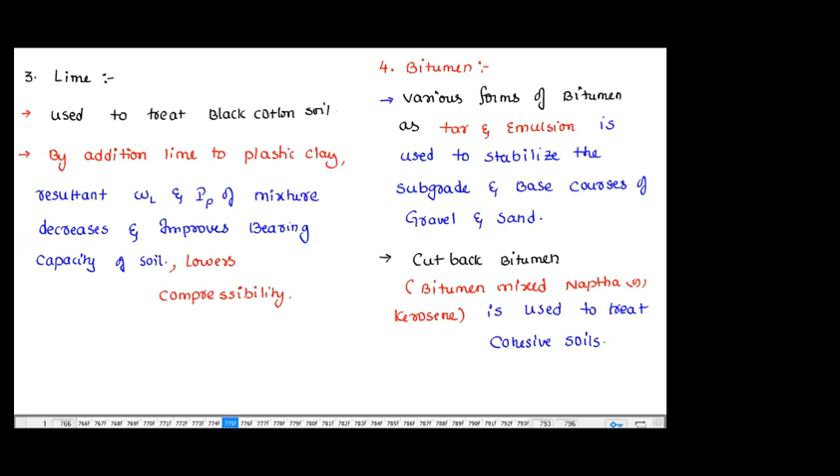That I'll give you in the afternoon session. In the afternoon session, more of the time I'm giving you for revision of the previous chapters only. That's the reason I asked you people to come from 2:30 to 8:30. We'll be having 2:30 to 4:30 to complete the syllabus. Then from 5 to 8:30, we'll see the GATE 2020, GATE 2021, ESE 2020 and ESE 2021 question papers, so you will get to know in which chapters the questions are asked more. Okay, we'll see that later.